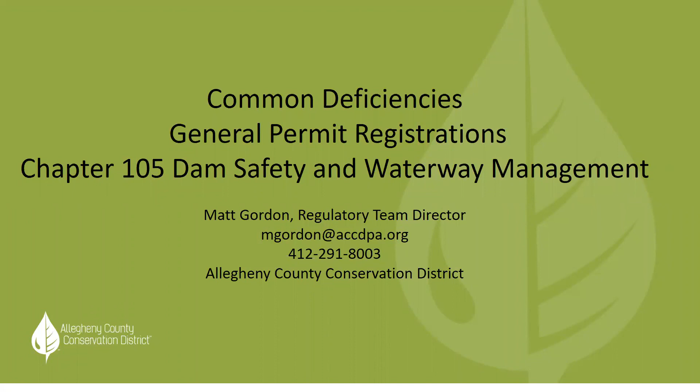Just some review. Title 25 of the Pennsylvania Code contains all of Pennsylvania's environmental regulations. Within that, Chapter 105, Dam Safety and Waterway Management, regulates obstructions and encroachments. These are any activities or structures that would change the course, current, or cross-section of a stream, floodway, wetland, or body of water. The authority for the regulations, the actual laws that were passed, are the Clean Streams Law and the Dam Safety and Encroachments Act, as amended in part.

ACCD, like a lot of conservation districts statewide, has a delegation agreement with the Department of Environmental Protection to administer certain aspects of the program. We've had our delegation since October of 2014.

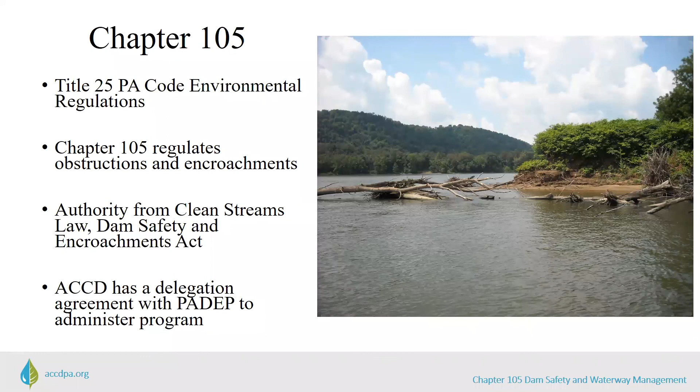105.11 lays out permit requirements. An individual or entity may not construct, operate, maintain, modify, enlarge, or abandon a dam, water obstruction, or encroachment without first obtaining a written permit from the department. The regulations are further broken out by subchapter, defining different activities. There's a chapter on commercial dredging, for example, and on enclosures whenever 100 feet of stream will be lost in a culvert. That further goes on to outline permit requirements and design requirements.

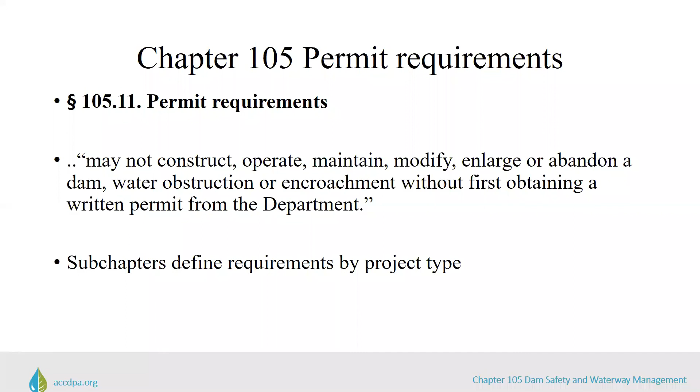Locally here in Allegheny County, there are different permit entities. For dam permits, all of those go through the Division of Dam Safety, which is in the Central Office DEP in Harrisburg. For review of small projects permits, joint permits, and general permits 10, 11, and 15, those are reviewed at the regional DEP office in Pittsburgh. The Oil and Gas Bureau also reviews 105 permits associated with oil and gas activities. And the Conservation District, under our delegation with DEP, receives and reviews general permits 1 through 9.

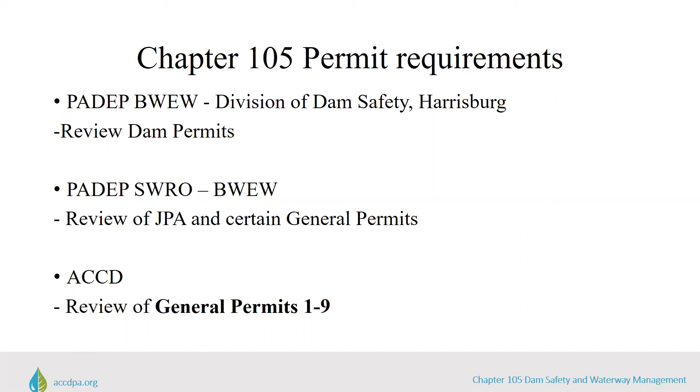Section .442 outlines the authority of the department to authorize general permits. These are for projects that are similar in nature, projects that can be adequately regulated using standardized specifications and conditions, where the registrations submitted meet the specifications and conditions and will comply with the requirements for permit issuance. So the general permits cannot have special conditions written into them. There's a standardized set of conditions for each general permit activity.

When you're submitting a permit, or submitting a permit on behalf of a client, what you're doing when you register that is showing us that the project as designed and spec'd out is going to meet all of those standard conditions in the general permit.

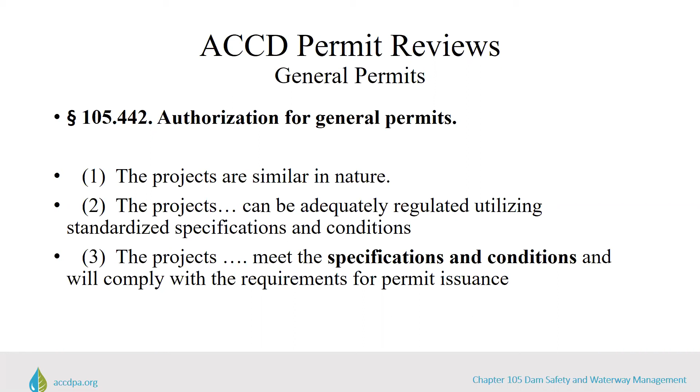This is a list of the 9 general permits that ACCD receives and reviews under our delegation with DEP. I mentioned earlier we've had the delegation agreement since October of 2014. It's interesting—when I was putting this together, I started running some different data pulls. We have a cloud-based permit database, and from October 2014, when we got the delegation, to the end of June 2020, GP3, GP5, and GP7 made up approximately 78% of permits submitted to the district. So when I went through some of these conditions and looked at common deficiencies, I focused on those first, because they represent roughly 4/5 of what we see come into the office.

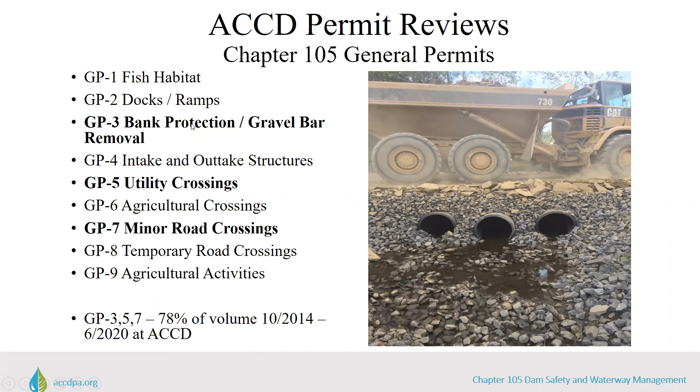Just some other historical data looking at the general permits we've received over the years for 105, by the end of June.

519 out of 822 GPs that were submitted had follow-up deficiency comments sent for them. 70 out of 822 general permits submitted have been withdrawn. There was something that made them ineligible for coverage in a lot of cases. And being nearly at 6 years with the delegation, we've noticed patterns of recurring deficiencies that come up over and over in reviewing these.

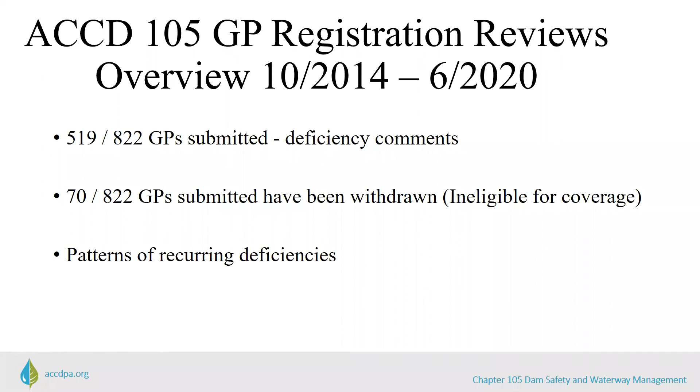For the purposes of this presentation, I broke those common deficiencies into 3 general buckets. The first one is an inability to meet GP conditions. To qualify for general permit coverage, the proposed activity has to meet all the specific conditions and requirements of that general permit. We see permits submitted that simply can't meet those general permit design conditions, and they have to be sent on for a small projects or joint permit, or GP11, from the regional office.

The second common category is not accounting for all aquatic impacts, and that results in incorrect permit submissions. We get a permit submitted for a GP7, say, in a subdivision, but there are other impacts to 105 regulated areas, wetlands, streams, that would kick it out of coverage for just a GP7, would require other general permits, or possibly a different 105 permit from DEP.

Also, waiver 2 considerations. Waiver 2 is for obstructions in a stream with a drainage area of less than 100 acres. There is an overarching blanket statement with waiver 2 saying, upon complaint or inspection, if the DEP determines there's a substantial threat to the environment, people, property, or safety, something that would be otherwise waived could have a permit required, and that comes up in these reviews sometimes.

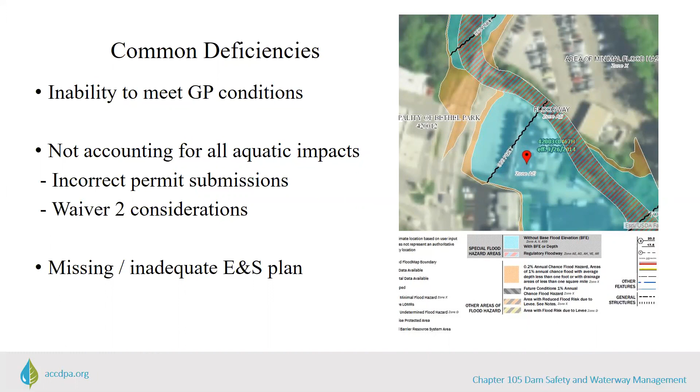And also missing or inadequate E&S plans. I'm not really going to get into E&S reviews. I think that's appropriate for an entirely separate presentation, but just that E&S plans are required, and what needs to go in with them, we'll discuss that a little bit.

So the first category of common deficiencies: the Chapter 105 general permit limiting conditions. Over time, there's certain conditions we've noticed are difficult in the submission process, where we see this can't really be covered under a general permit because it violates one of the general permit conditions. Each of the general permits have conditions and sites where it doesn't apply. Then there are general conditions that apply to all of them, like E&S plan, having a PNDI, etc. And then there are specific conditions, so the specific conditions for GP3 are different than GP5, or different than GP7, etc.

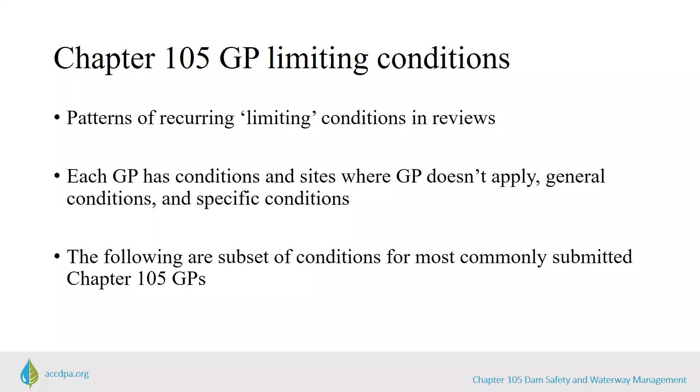The ones I'm going to go over today are a subset of conditions for the most commonly submitted permits to our office under 105, so this is not an exhaustive list. Of course, before applying for a 105 permit, I strongly recommend you read the entire conditions, areas where the general permit doesn't apply. As an applicant, to save time, or as a consultant, to save your client time and make sure you qualify for that general permit. But these are a few of the limiting conditions we've seen time and time again with the commonly submitted general permits.

The general permit 3, for bank stabilization, rehabilitation, and gravel bar removal, a couple things that come up often. Condition B5: projects that involve channel relocation, realignment, or placement of fill to construct berms or levees is not covered under GP3. It's somewhat common that we get permits where, in addition to stabilizing an eroding bank, the landowner has an interest in creating some type of berm or levee to raise the stream bank elevation so that in high flows their property does not flood. That would not be covered under GP3 and would need to go through DEP for a permit.

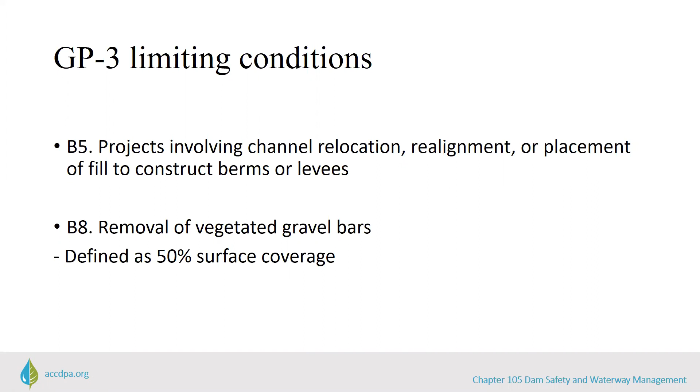For removing gravel bars, removal of vegetated gravel bars is not covered under GP3. That's defined in the permit as having 50% surface coverage of vegetation. If you're working for a client or want to submit a permit with gravel bar removal, that's fine to do within 6 inches of low flow, but if it's greater than 50% covered with vegetation, that would not be covered.

Condition E8, slope protection should not be placed with an exterior steeper than 1.5 to 1. This comes up a lot of times with road projects. If it's a road that was built right next to a stream, there's not enough space. You can't have the grade, it's just not there to lay it back any farther. In those conditions, you can consider a wall or a gabion basket if you're proposing riprap initially, if you can't meet the slope requirement.

Channel deflectors may not extend in the channel greater than 25% the width of the channel. You can use channel deflectors under GP3, but they have to meet that condition. If it's appropriate to have a larger channel deflector structure, consider applying for GP1. There are a lot of different approved structures by Fish and Boat that are deflectors that can be permitted, just not under GP3 if they extend more than 25% into the channel.

And a really common one for walls that are proposed, the maximum height of a wall permitted under GP3 is limited to 6 feet, measured from the top of the wall to the bottom of the stream. If possible, you can minimize the height of the wall, reconsider design. A lot of times, if it's a really high eroded bank, it's just going to have to go the route of a joint permit, or if there is some other structure there that's being modified or replaced, the GP11.

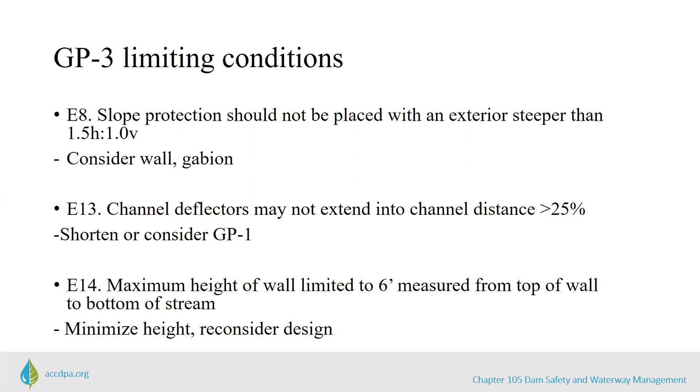This is a cross-section of a drawing that was submitted for proposed coverage under GP3 to our office. This permit registration was eventually withdrawn. It's difficult to see, I know, when I stretch the photo out, but on the outside, the height of the wall from stream bed to top of the wall is 11 feet.

Additionally, it doesn't tie in with the existing parking lot there, the asphalt surface. It's about 2 feet from the top of bank to the top of the wall, acting as a berm or levee. So this project cannot be covered under GP3. We would write a letter explaining the conditions, and this was withdrawn and resubmitted to DEP as a joint permit.

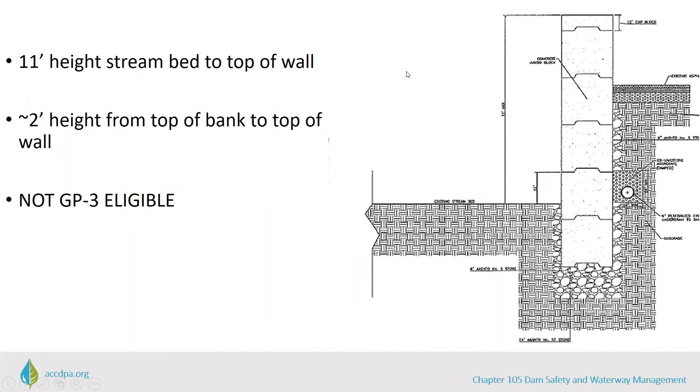The GP5 utility line stream crossings, there aren't many conditions in this that are strict that limit issuance, but it does come up often, and it's usually one of these two conditions, especially the first one. 12B, for crossing under a stream bed with a utility, a minimum of 3 feet cover from the top of the utility to the bottom of the stream bed is required, or it can be 1 foot in bedrock.

Especially comes up with sanitary sewer designs. If there are existing manholes, it might just be impossible, if the stream's degraded and been down cut over time, to meet that grade in a replacement. For newer lines, it's pretty straightforward typically to meet.

Condition 12K, utility line crossings of streams should be accomplished so the line is at a right angle to the stream bank. The purpose is straight line, shortest point, minimize disturbance in the stream. If it's a little bit off, the condition says should be accomplished. If it's 89, 85 degrees, deviates slightly from that, there's something local with the topography that makes it impossible to do a 90-degree angle, we typically cover that.

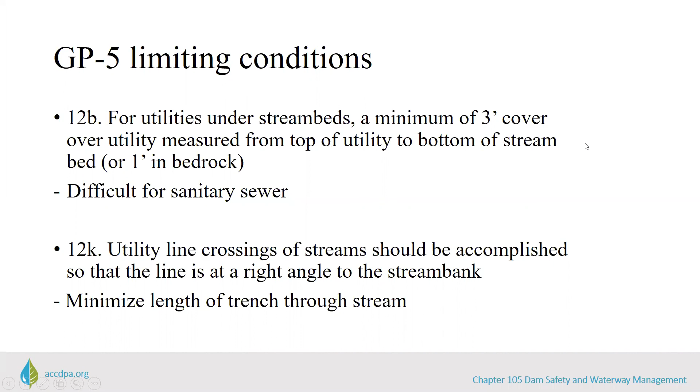GP7 limiting conditions. The GP7 is for minor road crossings. The GP7 has a lot of conditions compared to the other general permits we review, and tends to be difficult to meet all the conditions. There are several limiting conditions that come up in the review of these.

First off, the GP7 does not cover stream enclosures. If a culvert over 100 feet is proposed, it's going to have to be a small projects or joint permit. Any crossing where the upstream watershed drainage area is greater than a square mile cannot be covered under GP7. During review, we just use USGS StreamStats to obtain a drainage area to make sure it is under that square mile threshold.

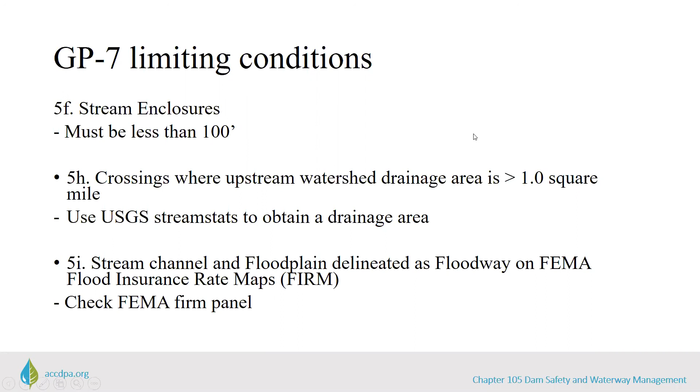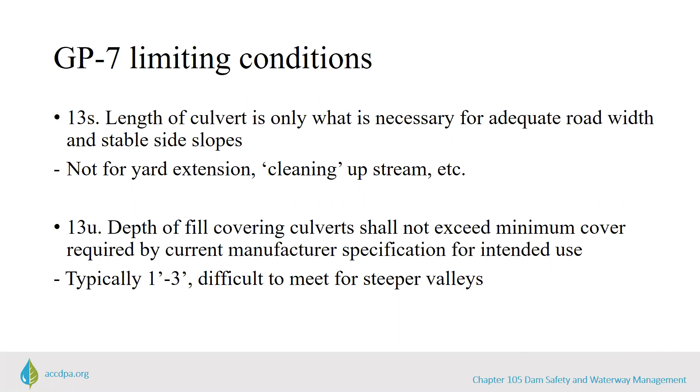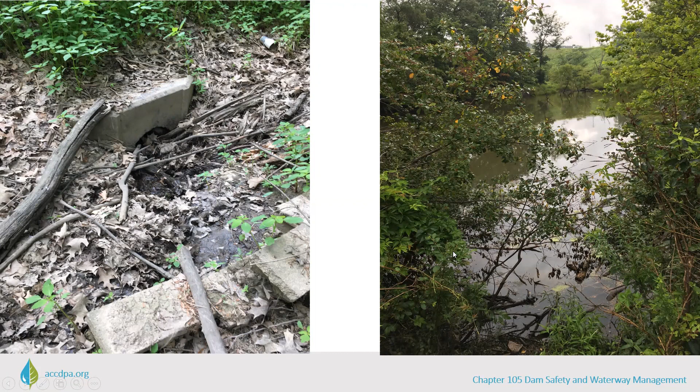The picture on the right, when I took this picture, I was standing on a road grade, and about 15 feet vertically down, there's a clogged 24-inch concrete culvert. With that much fill, it's very difficult to maintain, and that's why these have to go through a joint permit review and have really specific requirements for operation and maintenance. This was also a compliance site, and earlier this summer this got taken care of and ameliorated. They dredged down, opened the pipe, and did a restoration here. There were several sanitary manholes underwater, and the road berm was acting as a dam, which it clearly wasn't designed for, as a public safety issue.

The second major class of common deficiencies is not accounting for all aquatic impacts when we review a permit. So 105 regulates the stream channel itself, the 100-year floodway, and if there are any present, any wetlands, whether within a stream or located far away from a stream. And we see projects where there are additional aquatic impacts that aren't accounted for in the permit. That could result in needing additional general permits, could result in needing a joint permit or something else from the regional office, and it happens somewhat frequently.

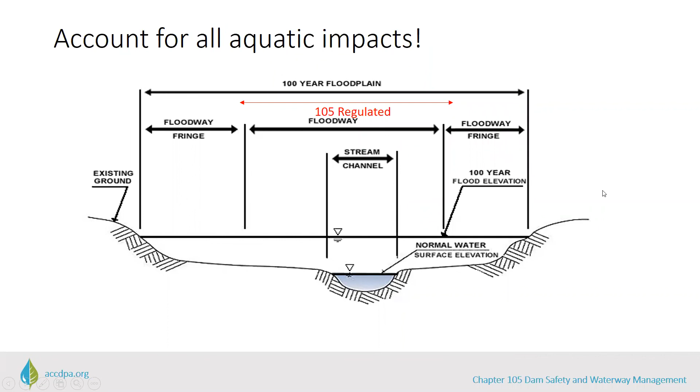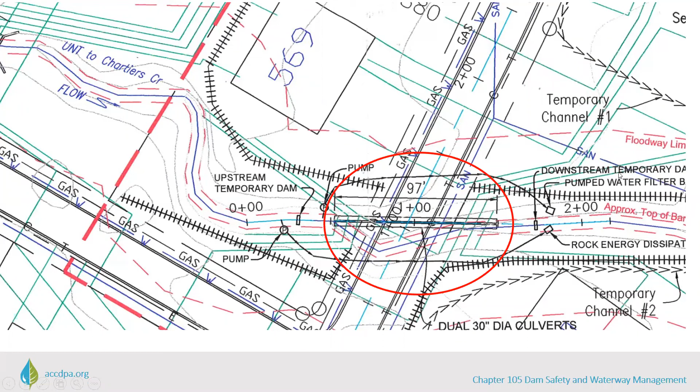This was also submitted to our office as a GP7. See the culvert here, some fill on the slope that's impacting wetlands. GP7 does allow wetlands impacts, that's okay. But again, the minimum impact for a stable road crossing, they didn't account for all of their aquatic impacts.

The fill up here that's in wetlands and goes to the edge of the stream, one is within the wetlands, two within the 100-year floodway. And this really isn't associated with the crossing. I mean, it's not filled down to here to get away from there. This is fill for building pads once they get across the road. And GP7 wouldn't cover fill in wetlands in the 100-year floodway for development of commercial or residential space.

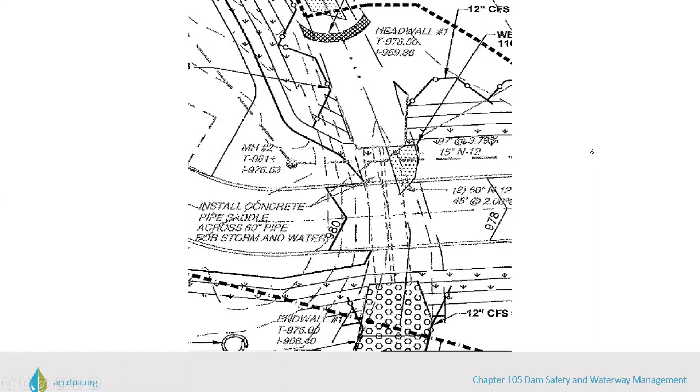I mentioned earlier waiver 2. This was an NPDES project recently submitted to our office that proposed all of its aquatic impacts as covered by waiver 2, which is any obstruction in streams with less than 100 acres drainage area. But again, all of the waivers under 105.12(a) have a blanket statement saying if upon complaint or inspection, DEP could require a permit for something that's otherwise waived if they determine there's a substantial impact to safety, property, people, the environment.

In this particular case, this is a snapshot of some of the aquatic impacts, but there are several culverts here on a smaller under 100 acre drainage area stream. There's fill here in the assumed floodway of the stream. It then goes back into a culvert down here. And after reviewing this, DEP made the determination this is not covered by waiver 2 and will require joint permitting, 105 permitting.

So just be aware before submitting anything that that's a possibility with things that you intend to cover under waiver 2. Typically for smaller impacts on warm water fishery streams, say a single utility crossing that's really limited disturbance, or a basin outfall in a stream less than 100 acres drainage area that's just a riprap apron, that's more likely in the eyes of the department to have a small impact on the environment, people, safety, health, property.

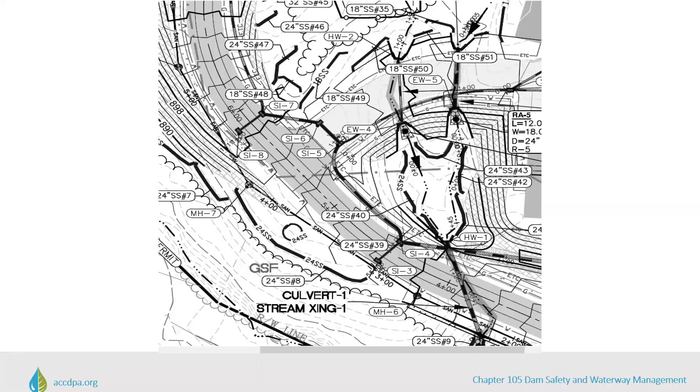Finally, Chapter 105 general permits and erosion and sediment pollution control plans. We still have permits submitted without E&S plans, or will have to discuss with a consultant or an applicant before submitting why they need an E&S plan. So there's a citation in the regulations themselves that application for a permit shall be accompanied by proof of application for either a permit or an E&S control plan for activities in the stream and earth moving activities. So there's a regulatory citation in 105 about the requirements for a 102 plan.

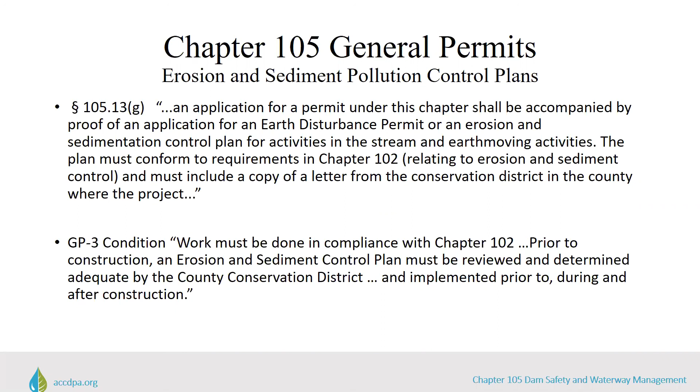And in each and every single one of the general permits themselves, there's a condition that's the same or similar to this one I copied and pasted from the GP3, that work must be done in compliance with Chapter 102, and prior to construction, the E&S plan must be reviewed and determined adequate and implemented before, during, and after construction. So E&S plans are required for Chapter 105 general permits.

If the 105 permits are coordinated and associated with a 102 permitted activity, such as an NPDES construction stormwater permit, or an ESCGP3, the appropriate BMPs, sequencing, etc., can just be included with the 102 permit E&S plan. That 105 activity is then covered by a reviewed and approved E&S plan as part of the bigger NPDES E&S plan.

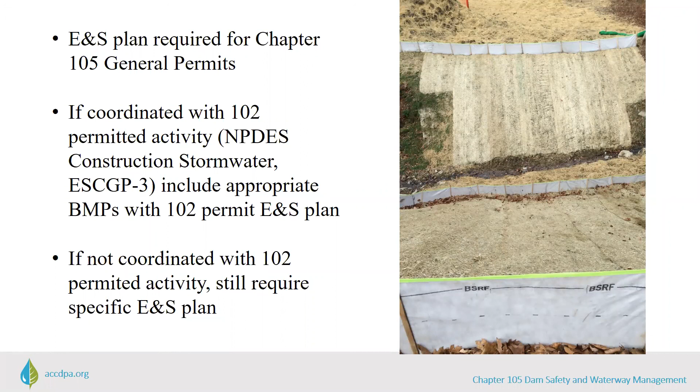But if it's not coordinated with the 102 permitted activity and you're submitting a Chapter 105 general permit registration, it still requires a specific E&S plan to be submitted and reviewed. And we often get questions, well, what do I have to submit for that type of E&S plan? How much do I have to include with that type of E&S plan?

102.4B5 lists the requirements for a written E&S plan. We expect the same format and inclusions listed there—it's the DEP's requirements under Chapter 102 for a written plan. There are 15 total items, but typically the Chapter 105 general permit E&S plans are substantially less complex compared to a 102 permitted land development E&S plan.

There typically aren't channels, traps, changes in impervious cover, stormwater requirements, basins, and so on. The 105 general permit E&S plans for smaller projects that don't trigger a 102 permit tend to deal with base flow in the stream, sequence stabilization, perimeter controls, etc., and stabilization details. So to write an E&S plan for a 105 general permit, you should follow the 15 items in 102.4B for a complete plan.

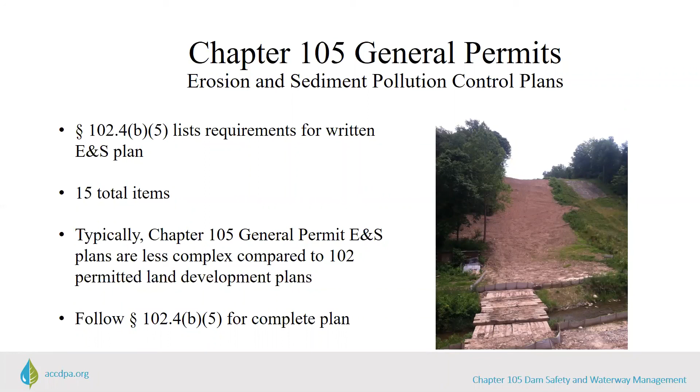For the purposes of today, E&S review for 105 permits is its own topic, but these are the requirements listed in 102.4B for an erosion and sediment pollution control plan. Some of the ones I've bolded, because of the nature of 105 activities covered under general permits, often don't trigger the need for this.

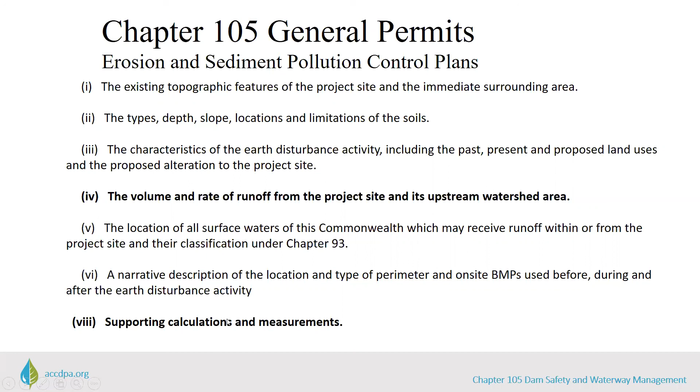So volume and rate of runoff from the project site and its upstream watershed area—you're typically not speccing out any channels or traps with these 105 general permit activities, so that could be N/A in an E&S plan submission. Supporting calculations and measurements tend to be pretty limited. With riprap bank protection, maybe there's a justification on shear stress in the stream, or something for silt fence or compost filter sock, speccing out the actual size and providing justification with slope length and slope percent, but not compared to, say, an NPDES permit with basins, traps, and channels.

Naturally occurring geologic formations—for certain activities, say a dock on the river where it's just building a wooden dock with maybe a single pile driven into the riverbed, you wouldn't really expect an in-depth geological formation analysis. For something like a riprap apron that's just going to be at grade from storm discharge, you just show the calculation justifying the riprap apron, per the E&S manual. But if there's no excavation or anything, there's no need for an in-depth soil or geological analysis.

Thermal impacts with 105 a lot of times are just restored or N/A, and because it's not a permit requiring PCSM plan coordination—if you're under an acre, 102 doesn't require a PCSM plan or stormwater requirements for most activities, so there wouldn't be coordination with the PCSM plan.

Similarly, for existing and proposed riparian buffers, there are requirements in 102 to stay at least 150 feet away from a special protection watershed. If you're within that, there's a mitigation or BMP process to show that what you're proposing is at least as protective as the existing riparian forest buffer. But being under an acre and not having a permit requirement for, say, an outfall or a dock, it wouldn't trigger that 102 need.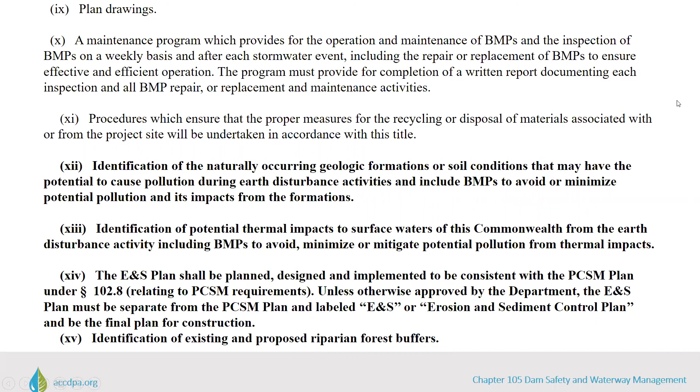So those are a few of the common ones we see time and time again with the permits we review, especially the GP3, 5, and 7—some of those limiting conditions. Of course, that was only a subset. Before submitting a 105 general permit to our office, DEP, or another conservation district, we strongly recommend reading over all the terms and conditions to make sure the permit's applicable. Those are just a few of the limiting ones we see time and time again.

If you have any questions as you go through permits or before submitting one, our office still holds open door Thursdays—we've been doing teleconference pre-application meetings. We're also always available by phone or email for any 105 permitting questions.